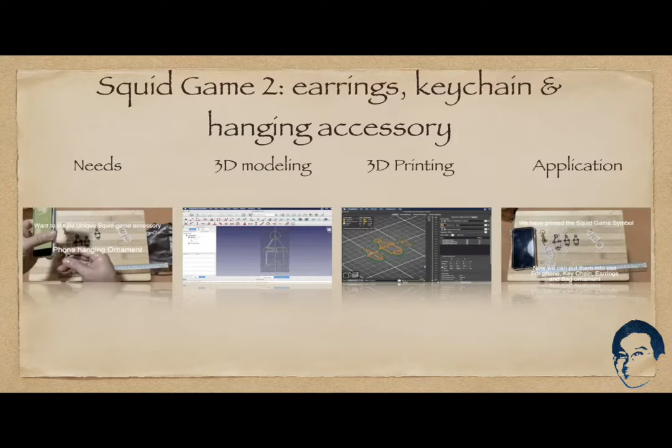In this video, I'm going to show you how you can easily create your hanging accessory, earring and keychain with another Squid Game symbol. Let's see how we can use the newly created Squid Game accessory.

We have the Squid Game symbol part printed in various sizes. If you recall, we create a part with a width of 20 mm. Then scale it down by half, and this is the one which is about 10 mm. We also scale another one down by 30%, which gives us about 15 mm. And we print them in different colors so that we can mix and match according to our preference.

We can use the accessory as a hanging ornament for your smartphone, as you can see here. We can also use it as a keychain ornament, which will look great too. Of course, the parts can be made into earrings, which look nice too.

You might wonder why there is another Squid Game symbol accessory here. This is the one we made in our last video. If you are interested, please watch that last video. This is the previous accessory, and let's add the newly created Squid Game accessory on your bag as a hanging accessory. Don't both accessories look great together on the bag?

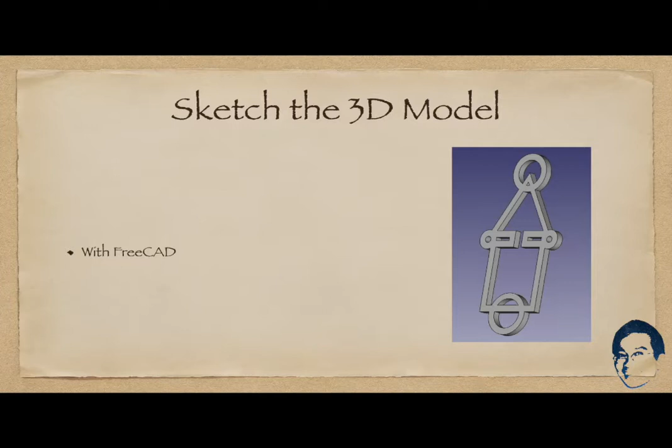Do you like the accessory we have made? Do you want to design and make them yourself? Now, I'm going to show you how to model the accessory with the FreeCAD software. Start your FreeCAD. If you do not have a copy of FreeCAD, go to freecadweb.org. There are installers for Windows, Mac and Linux.

In FreeCAD, select Part Design Workbench. Start a new document, a new body. Next, we move on to Image Workbench. In the Image Workbench, open an image. We have drawn the Squid Game symbol before on the image, and we import it now. This is the image of the Squid Game symbol.

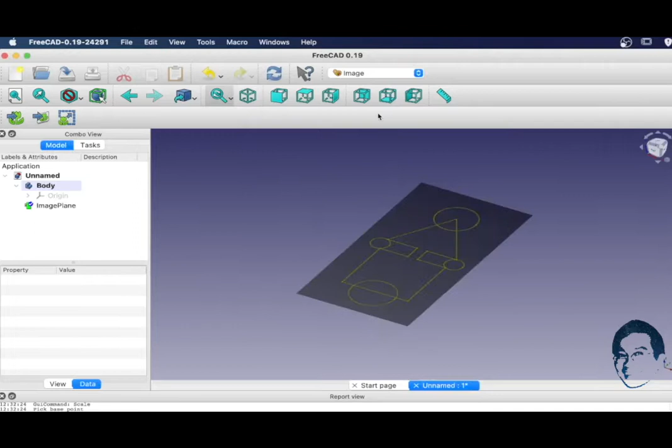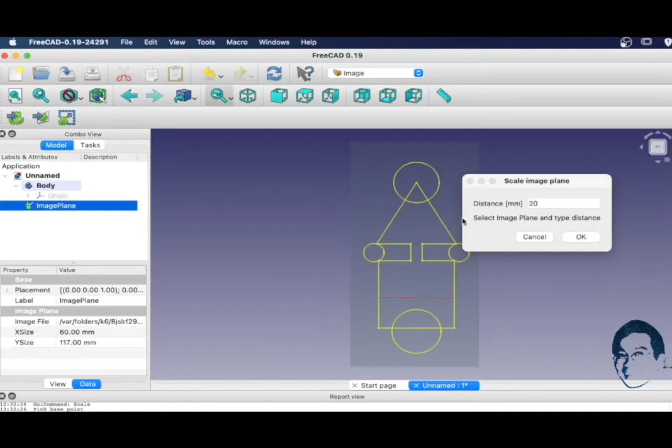Alright, with this image, we're going to scale it to a size that we want. Select this scaling tool here. The first thing to do is to select the first point, which is from here, followed by the second point on here. Alright, and the distance is 20 mm. Make sure we select the image plane here and click OK. So now this image is scaled to 20 mm.

If you want to confirm the image is indeed scaled, you can use the measure distance tool here and take the measurement from this point to here, and you can see that it is about 20 mm. Now switch back to Part Design. In Part Design, we're going to create a new sketch.

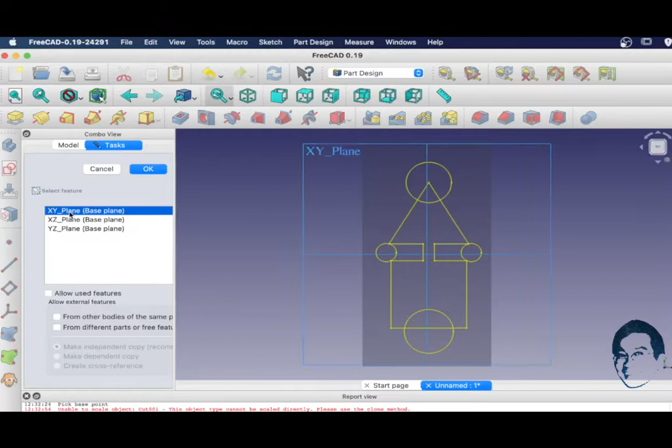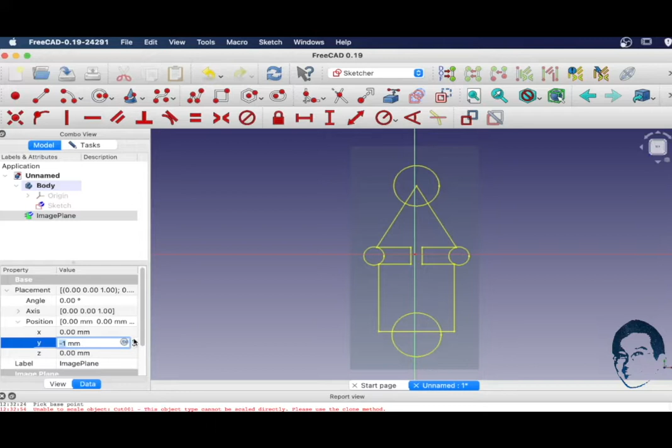Select the XY plane. We're going to draw the sketch over the image here, but first of all we want to adjust this image such that it's central. So let's go to the model here, select the image plane, and under the placement you can see the position setting here. On the Y axis I'm going to adjust it upward, so the line is aligned to the X axis, and on the X position here I'm going to move it 0.5. Right, pretty centered. Okay, we are good with that.

We will start to do the sketch, starting with using the line tool here and trace it along the image here, and continue vertically up from here, horizontally across. We'll adjust it later on to make it align to the sketch. Let's get the sketch going. As you can see here, we reach here, and here basically because there is a thickness in this drawing that we're going to sketch, so we will go way up here to here.

The whole thing is that, if we are drawing the thickness of the symbol, that's how it looks, right? This is the inner part here, and continue drawing the line that you require for this. And since this is the inner line, we need to draw it out here. Right, so you can see the line required, and also from this point out here. Okay, let's get the line outline out first.

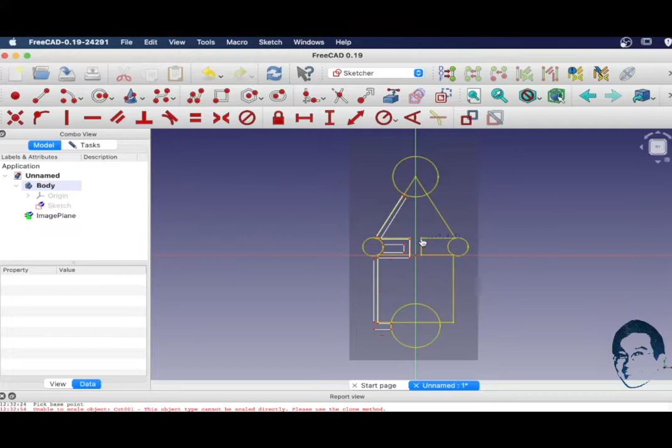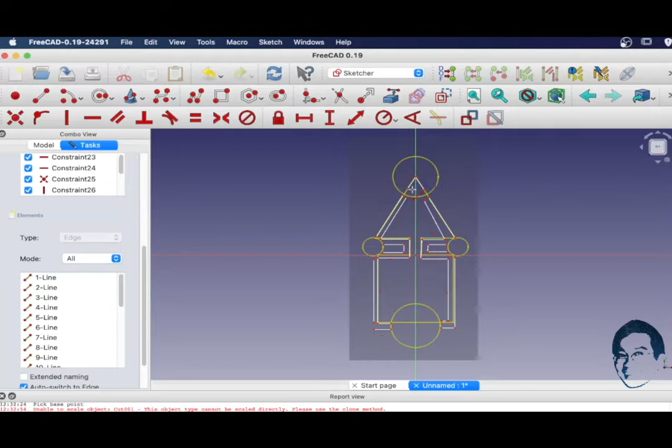Okay, let's move it outward a bit and go back to line 2 and continue the outline of this sketch. Let's continue from here, up from here, up here, up from here, down from here, up, down.

Alright, so this is all the straight lines that we require to draw, and for those lines that are not horizontal or vertically aligned, we need to make sure that we set them horizontally or vertically constrained, so that they are easily adjustable, like what you see here. Let's adjust the line accordingly. As long as we can adjust them, that means they are properly constrained.

Okay, so these 2 points need to be constrained together. Constrain it. Okay, we are good. And adjust it up. So the next thing is to select the arc tool and draw the arc at the center here, and constrain to this point, down to this point.

And the radius, this should be about 6.5. And with the arc tool again, we are going to constrain from the center here with the arc here, this point as well. Okay, and let's set the radius to 6.5.

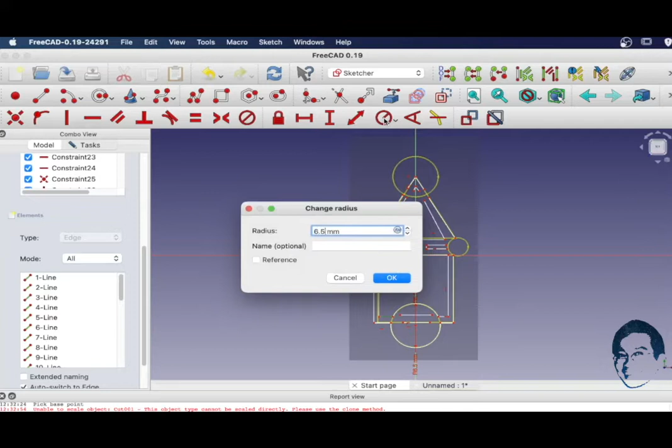And the next one is to draw the arc for the inner parts, from this point all the way to here. Let's set the radius of this to 4.5. Continue with the arc, this point to this point, and the radius is 4.5.

The distance between these 2 points is 2 mm. Okay, likewise go to the distance between these 2 points. Or rather, we should constrain this and this line here and set it to 0 so that they are always aligned when you move them.

Likewise, go to these 2 points here, constrain vertically to 0, so you can see that they'll be constrained together. Same, go to the left line here and make them constrained to 0 so that when you move them, they will go with each other.

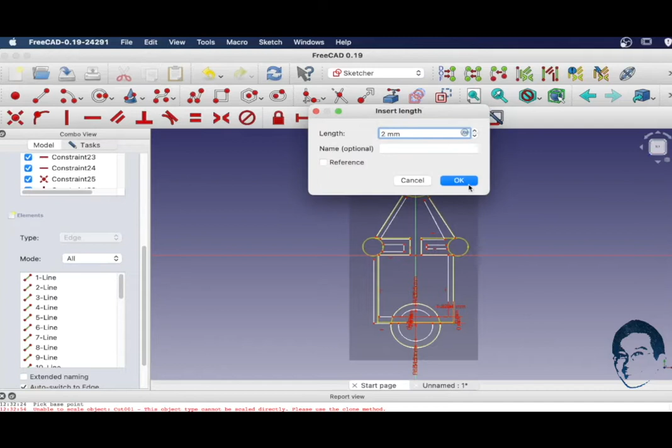Alright, and also the width between these 2 lines here is 2 mm as well. So likewise go to here. Okay, I guess we are good on the bottom end here. Let's do the point here.

So this needs to be further adjusted. This point needs to be further up. Okay, now take the arc tool as well. Let's draw the arc connecting from this point to the point here.

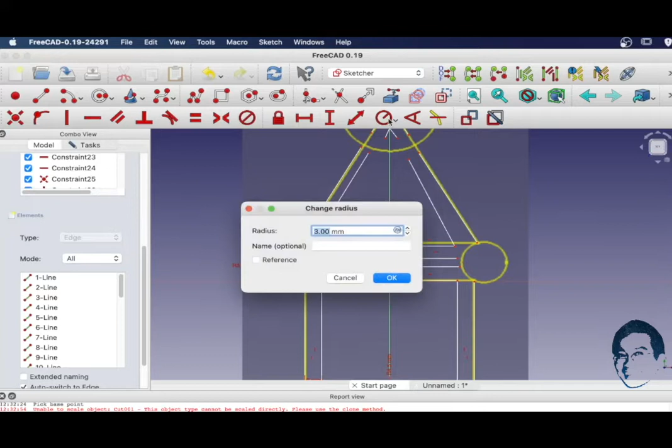And likewise from the same center point, we are going to have an arc from this point to here. And the radius for this is, here it shows 3 mm. I guess we can leave it 3 mm, which I think is good. And since this is 3 mm, we need to set this to 3 mm as well.

And we need a center circle as well. So take the circle tool and draw a center circle. Set this radius to 1 mm. The distance between these 2 points here, horizontal distance, will be 2 mm.

Okay, we'll go on to the right side here and create the arc here as well, starting from this point to the yellow point of the line here, and constrain to the center, starting from this point to up here. Alright, and we'll set the radius the same as this side, equal, and likewise this one to this, equal.

And likewise we'll have a circle at the center here. The radius is equal to this as well. Vertical height between the 2 points here is 2 mm. Likewise go to this point and this point, set it to 2 mm as well.

And between here and here, the horizontal distance is also 2 mm. Do the same for this side as well, so that they are the same. Let's set the point here as well, 2 mm.

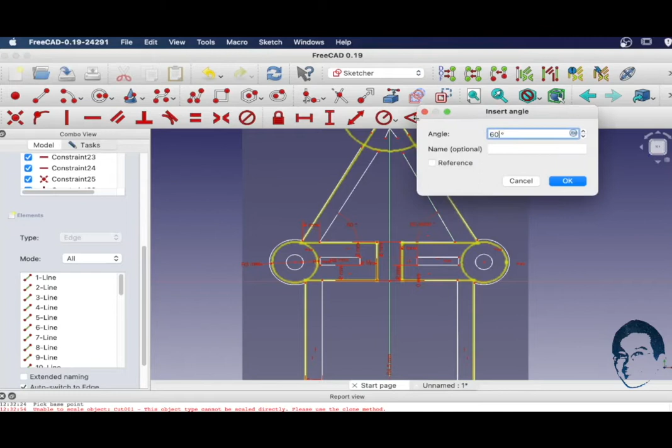And if you notice that this is not horizontally constrained, let's do it. Okay, so they are now horizontally constrained. So these two lines we expect to be parallel, but let's set the angle between this line and this one to 60 degrees. Likewise, go to this side here, we set to 60 degrees, and we want to make sure that these two lines are parallel so that they'll move together.

Let's set it to parallel, and same on this side, let's set it to parallel as well. Okay, so they'll move together when we adjust them.

Alright, let's start the top here with the arc tools. Starting at the center here, draw the arc from this point to this point. Okay, and from this point to this point. Likewise, from here straight to this point, and here, and start again another arc connecting these 2 points here.

Alright, let's set the radius for the bigger circle, 6 mm. So we set the radius the same, equal, and the inner circle radius is 4 mm. So make them the same.

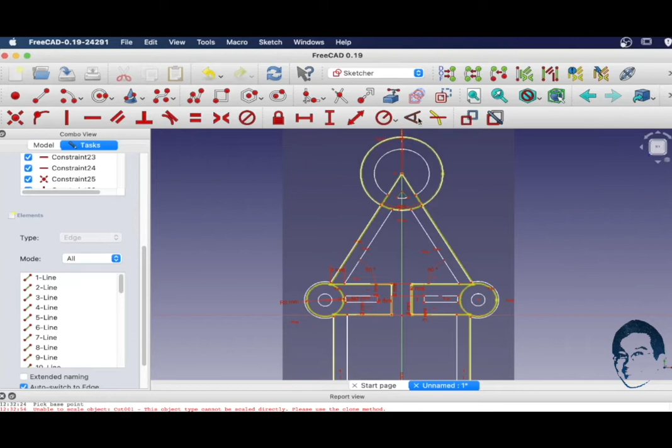So far so good, just adjust this accordingly a bit higher, and let's set this angle to 60 degrees. Likewise, set this inner straight angle to 60 degrees. Guess we are good, and we can now close it. We don't have to fully constrain it, right? So that's how it looks like.

Let's try this, we will pad it with 2 mm, the same thickness as 4, and this is how it looks. And we can now save it as Squid Game 2.

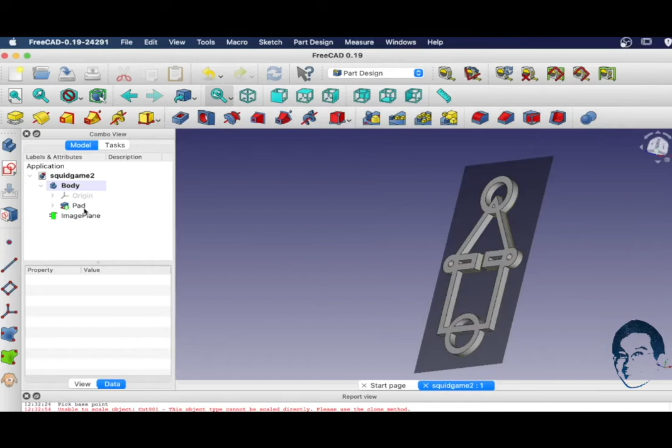Alright, with this done, we just select the final object, and we can export it to STL for printing. We call it Squid Game 2, save it as an STL, and now it's ready for printing.

Next, we're going to scale this object to another size. To do that, select Draft Workbench. In the Draft Workbench, select the object, and in the tool here, we can do a clone of this item. So let's select a clone of this. Now we have a clone pad 001, right?

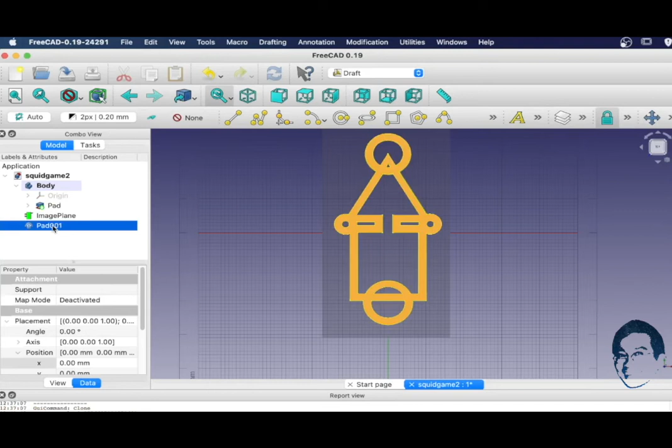And with that, we can do a scaling here by changing the size using the scale tools. Enter the point here, and let's do a uniform scale. Okay, create a clone of this, and I'll scale it to 0.5. So now I have an item that is 50% the actual size. You can see that if I measure the point between this and this, it's about 10 mm.

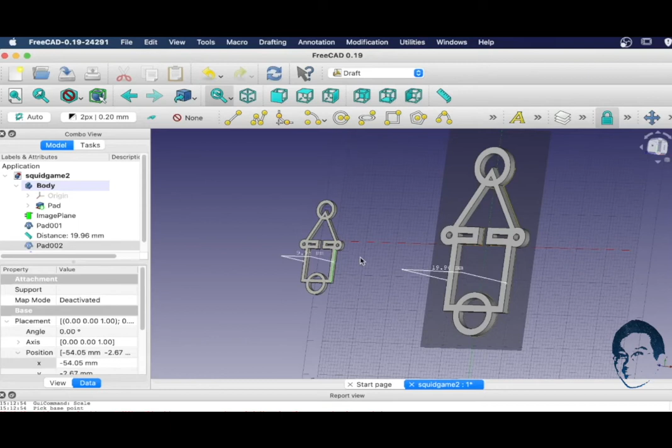With this item, I can likewise export this for printing, right? So I will call this game 2.5. So let's save it. Alright, so basically that's what you need to do.

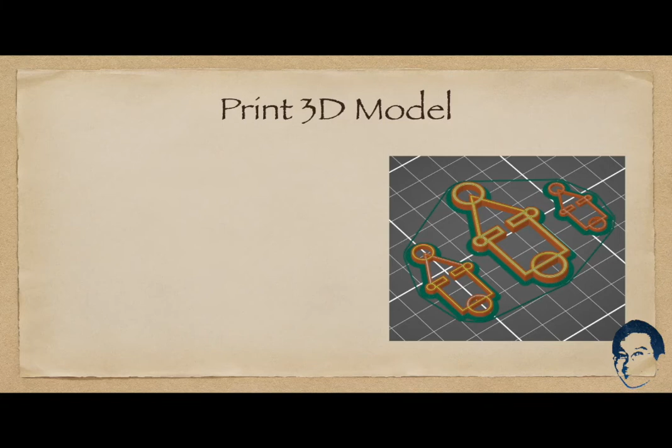With the 3D model done and exported to STL format, we are now ready to import the STL into the 3D printer slicer software. Start the slicer. In the slicer, click on Add, select the Squid Game STL file. We have 3 of them here, and click on Arrange.

They are all in various sizes. The bigger one is 20 mm in width, the second size is reduced by 25%, and the smallest one is reduced by 50%. With that, we're going to print with ultra detail because these are very small, so we want to print it as fine as possible.

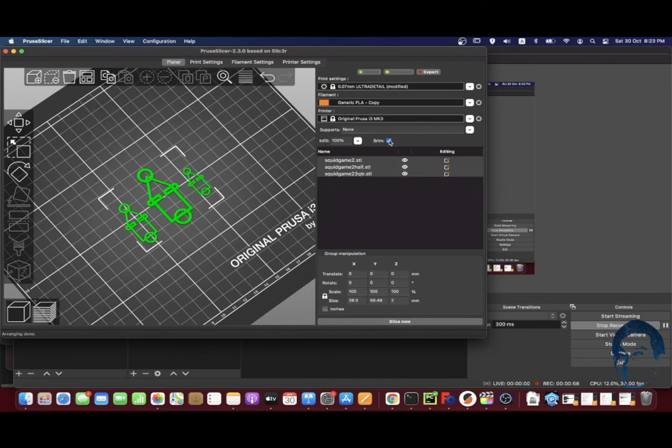And also we're going to print with PLA, and the infill we can leave at 100% or even a lower percentage, which doesn't matter. Since these are very small, we need to turn on the brim so that the print item will not move about. With that, we just need to click on Slice now.

This is how it looks like. You can rotate it, and you can zoom up to see how it looks, and also you can drag the orange bar here to see how each layer looks with the slice of the 3D model.

And you can scroll down on the right here to see that it will take 42 minutes and about half a meter of filament to print these 3 items.

If everything is good, you just need to click on Export G-code. You can take the default name here or input your own name. Once the file is exported, a message will pop up showing that the file is exported, and you can copy the file to the 3D printer for your print.